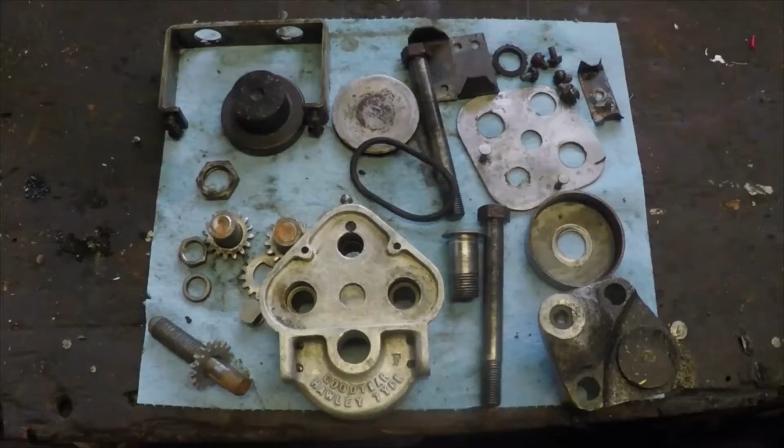Here's a Crosley disc brake caliper torn down to just about every piece. I'll show you a little overview of the parts. I've never seen one of these, at least in the last 40 years, really taken apart in pictures.

My goal here is not to make an exact assembly video, but just to show you how to put it together.

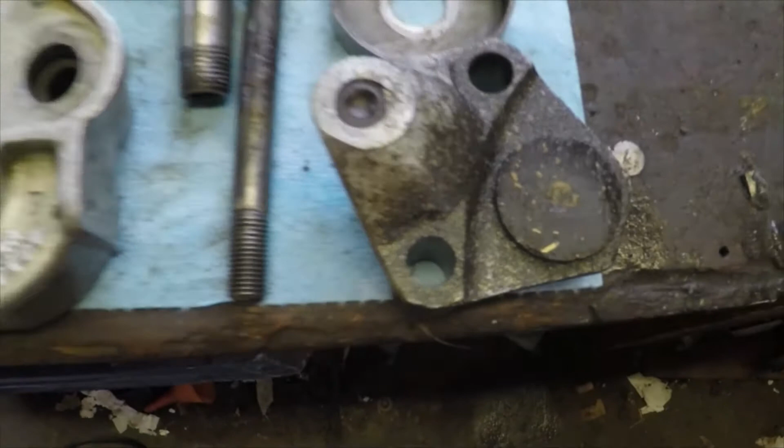This still needs a better cleaning and maybe to paint it to keep it from corroding.

So this is the famous, or kind of infamous, aluminum caliper that was known to dissolve and corrode from road salt and everything, and crack. And here's the front of said caliper.

So here, I'll set you up and I'll attempt to put it together the best I can, show you how it all goes back. So, where to start? Here's that caliper.

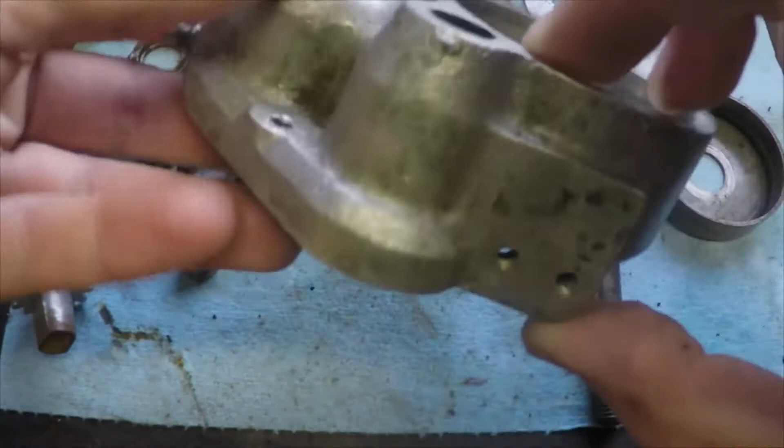I'll start on the outside, the hardware part. Notice it's very strange - this is not a self-adjusting caliper. Imagine the rotors right here. This is the back, this is the front, and it goes like this.

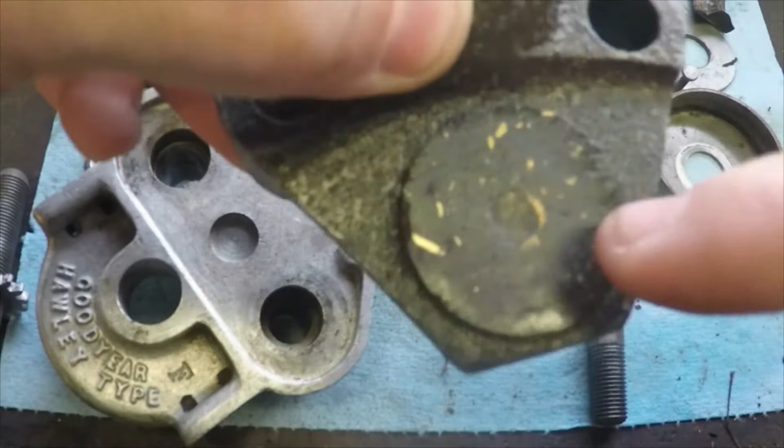Notice you have to rivet and unrivet these little brass rivets, and see right there, mine is down to it, so I have new parts. That won't be in this video - this is just an overview of it.

Shiny piece there. Somebody painted it one time. Anyway, alright, here we go.

So let's do the back part, the gears. Really weird as calipers go. Little rings go in these holes. They're just steel or cast iron, it's irrelevant. Okay, and we're going to make a whole bunch of gears now together.

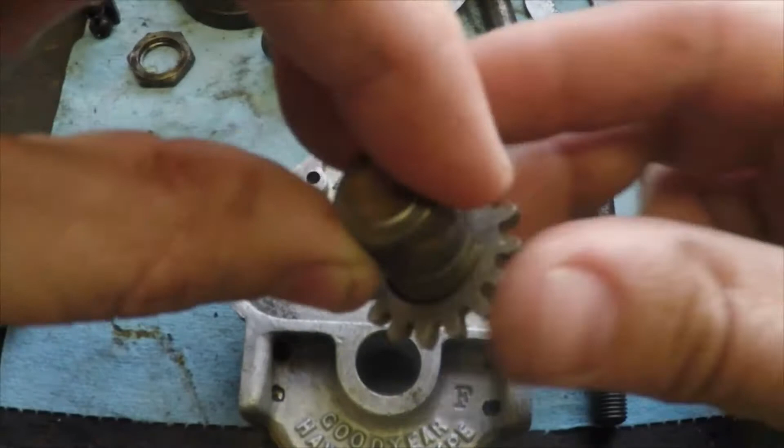See, they're not the highest of quality. So this caliper came out, I believe, in late '49 or mid '49, and they only did it to about mid '50 - it wasn't even a year. They had horrible problems with them.

See how that barely even... that's not even worn out, that's just how that's made. Anyway, put that there, see? Okay, same thing here. It's just atrocious quality, isn't it?

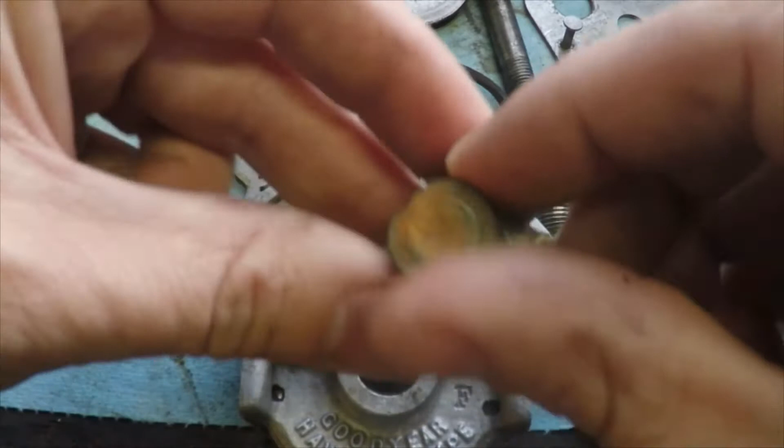Okay, put that in. Then this doodad - they're not directional, it doesn't really matter. Get it in there, you can see where we're going with this. Now there it is, here is this.

This is actually the adjuster bolt itself, and it's left-hand thread. There's no other way to do it, unfortunately. See what I'm doing here.

Notice up here there's a little hole, a grease fitting. So when I got this caliper off, I got it off really easily actually - nothing broke or was rusted solid, but these gears were just stuck beyond belief, like the adjustment. And that's because the grease inside turned to stone.

There you go, there you go. You get the idea, like that. Okay, and then this plate, just a steel plate, not even galvanized, goes all over top. So imagine there's a bunch of grease in here - squirt, squirt, squirt, squirt.

Like this. That's basically it on the back. So when you turn this, see how they turn? So this caliper does not self-adjust - you have to constantly adjust it, which is another problem.

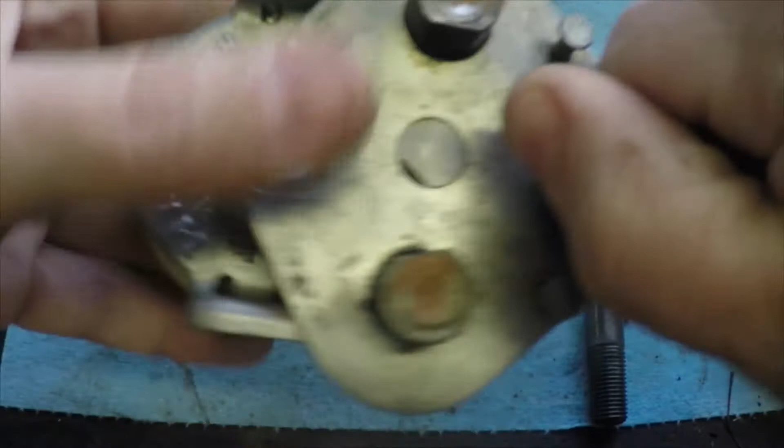It was fine on aircraft, what it was designed for. Here, here we go. Got stuck there. Oh, gear fell off - that doesn't happen when the cover's on.

There you go. You normally wouldn't take that cover off - I'm just inspecting it because, you know, it was built in about '49. I'm just inspecting. But anyway, you see how that turns.

Left-hand thread, and it pushes on this. So this is what you see when you take your wheel off, like this - the rotor right here. I'll show you a picture in just a moment to make it all simple. Anyway, so there's that, okay?

Now, while holding that together, they originally had something called a pulsator - it was basically just a flat rubber disc in between two pieces of metal. This is one of the first disc brake systems to come out in mass market. There were a couple others, but this is, for all intents and purposes, what we consider the first, at least stateside.

And so you got to think, well, how did they come up with this? They're used to drums, and actually my car, '48 and back, had mechanical brakes - mechanical drum brakes with cables. It was known, it was cheap, and there you go. This is an economy car, remember?

Anyway, so here's this little plate, which I thought - oh, got that out. It's just a cup. You notice inside this is rotten, but it gives you the idea. So this goes here, it's got a little hole through it. Get the hole just right, it's filthy. Anyway, it goes there.

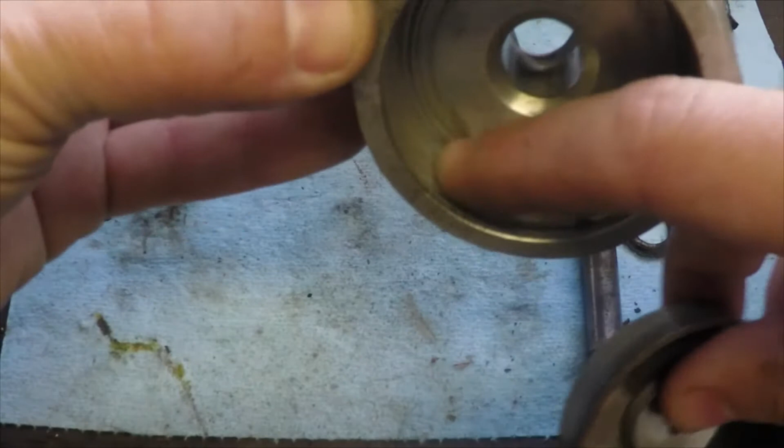And an O-ring goes on the back - just imagine that goes on the back. And then this hole - so this is not the actual surface where the brake fluid and the seal actually touch. This is just a housing, basically, to hold all this. That's it, okay? Like that.

Go over in the back, just forget all those damn gears a second - they all fell off. Hang on a second.

So brake fluid comes through here, and here's the little pipe. You put a nut on that little pipe, like this. There you go, like that. You get the idea.

A brake hose comes into here and screws in. You're probably already yelling at this like 'well, there's something missing here,' but hang on. So now, how do we get the brakes to move out?

Here's this, this is the upgrade. When these brakes came out, they had a pulsator. It was a little more than two flat discs with a rubber bit in the middle. It looked like a solid rubber bit, I don't know, I've never seen one. But then they quickly learned it was a horrible idea, and so they changed it to this disc.

So every Crosley with disc brakes, before they were discontinued, was sent back for a recall, or a service bulletin, I don't know if you paid. And we're given this instead.

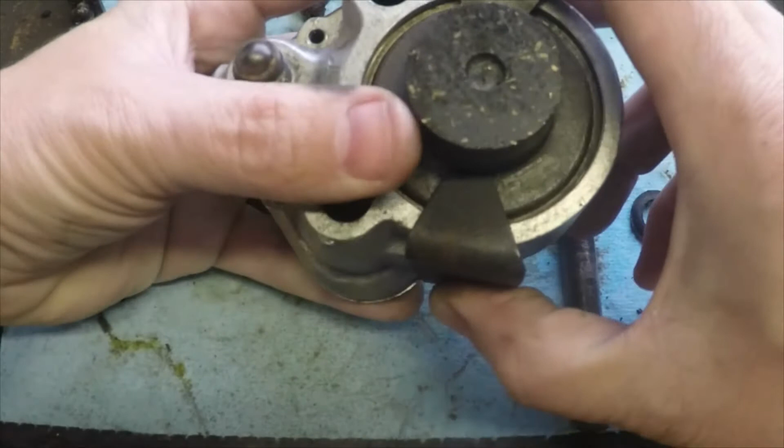And there you go. So maybe it'll push against that a little bit, and you'll feel it on the pedal. Don't know, it is kind of a spring steel, not just a regular - I don't think it's just a regular bracket. Maybe it is. Okay, so you got that.

So you got this all assembled, you're thinking, hey, I got this figured out. All right, what do you do now? So here's a bracket.

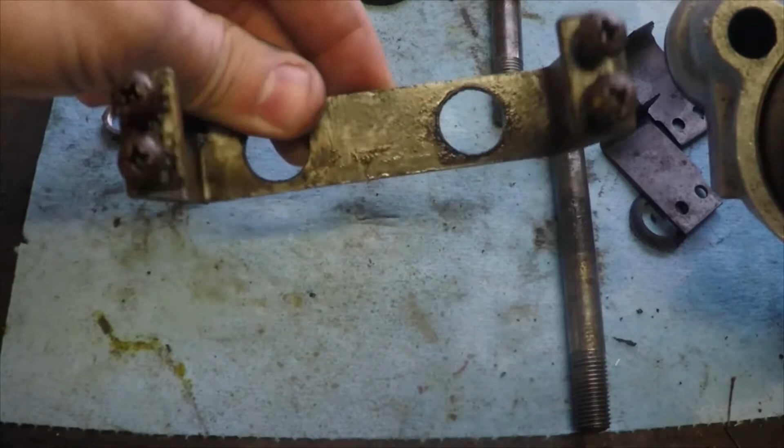This is quite a contraption, isn't it? It looks just like a bent piece of steel with four little Phillips head machine screws. Here's this, okay, over the back. Remember, this is all together already.

If you were just changing the brake shoes, you would just pop out that little hockey puck, take it all out with you to your press or whatever you're working on. This would all stay. Here's this.

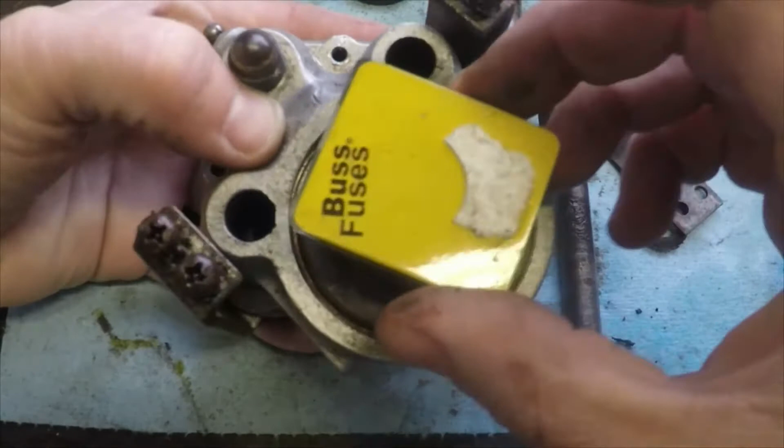Okay, there you go. Now, let's imagine here's our rotor - please, we'll get crap about that. Okay, so this goes over like that, all right? Something like that. Okay, so get that out of the way. Too thick, see, something like that.

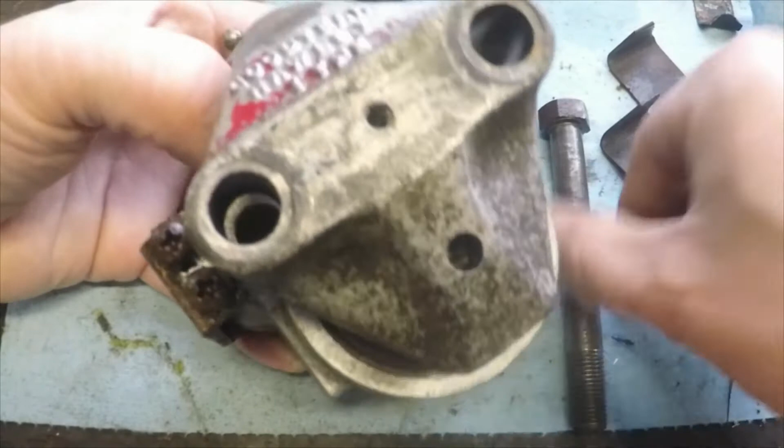And then where's your bolts? Right here, your bolts go in to those little things on the back, those hollow plugs that you saw had gears in them.

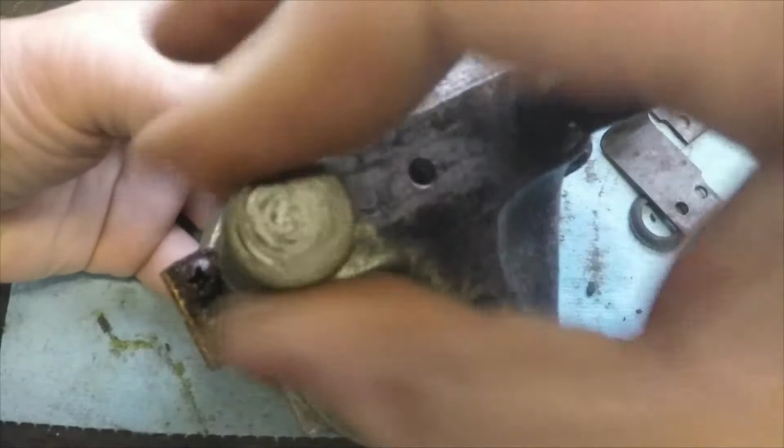Okay, so let me see what's going on here. So these, one, two, where my finger is here, these little brackets slide over a clamp. It's kind of a caliper bracket. I can't show you, it's too dark out there.

On the car itself, so that stays on. So the only thing this is attached to through the car, basically, is a wee little sheet metal bracket that sits on the car that this attaches to. These just kind of go through it. Anyway, so you screw these on.

We'll come to the adjustment here. Kind of a neat thing, isn't it? Don't mind this, those were those little springs I showed you. Use your imagination, they just sit right here. Okay, there you go, so it's on.

Well, how do you go about adjusting this thing? Okay, so according to the book, there's... where did that washer go? I didn't put it back on apparently. There is a washer that goes right here, okay? The lock washer, this is left-hand thread. I hope I didn't lose it. I'm sure it's replaceable. No, never mind.

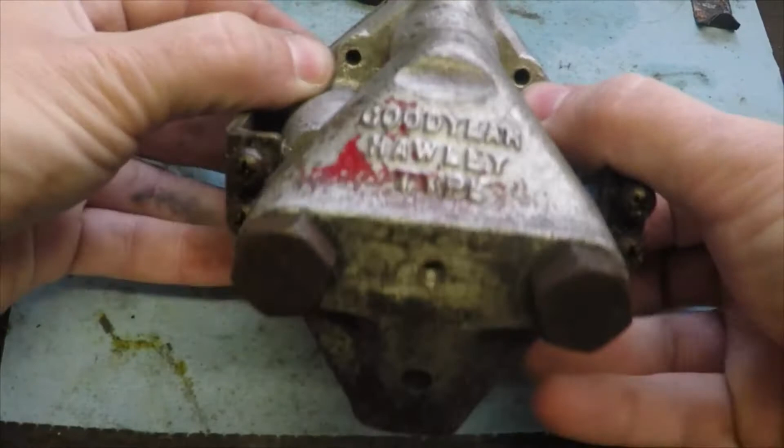There's one, I have a new kit. Okay, so there's a lock washer right here. You unloosen the lock washer, remember: righty loosey, lefty tighty. As you're facing the caliper, turn it this way. And once it gets snug, back it off, I believe, a quarter of a turn. Okay, then you lock this back. Fine.

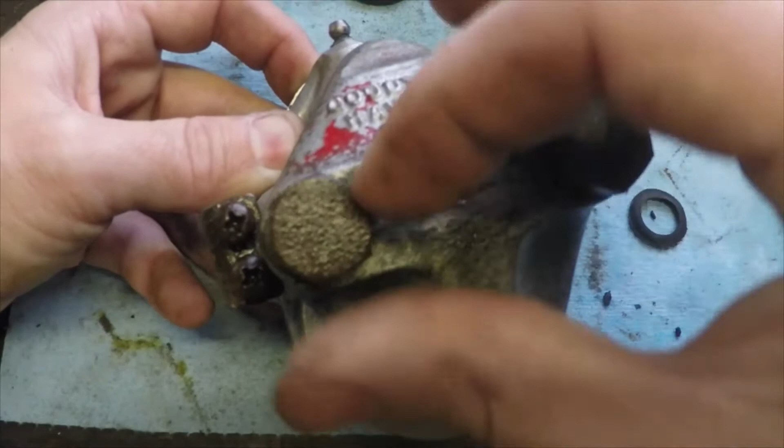Okay, so how do you tighten the front though? That looks really weird, I mean it couldn't be solid. So the book recommends, if you want to take this off or change your pads or whatever, once you take it off and do all your brake work, put this back on hand tight. It's a little more than that, that's probably even too much there. Hand tight.

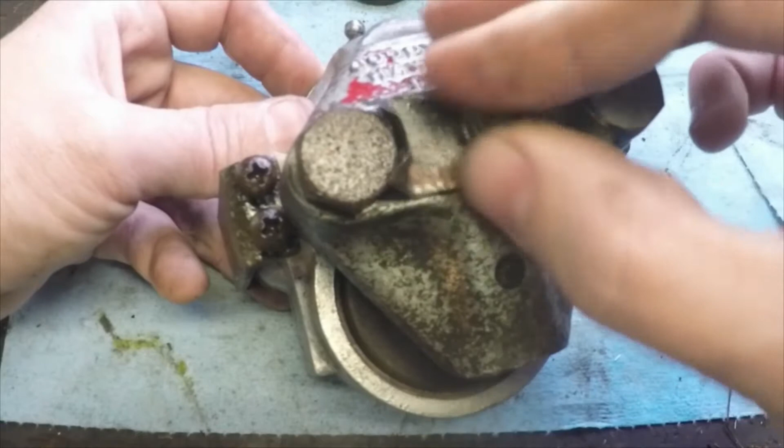So these are just loose, essentially, just snugged up by hand, that's it. And then this goes on. And you have a Crosley brake caliper, you see there's not much there.

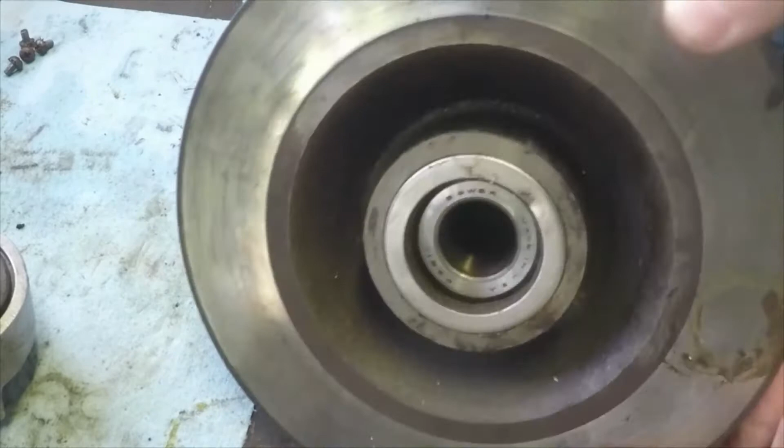Here is that Crosley rotor. See, it's all one piece. Still has the Bower branded bearings in there, those bearings are perfect. Has a felt wheel seal on the back. I have a more modern one coming, it attracts dirt so bad. Anyway, that's it, I mean it's just a rotor, but it's all cast in one piece.

I can only imagine how hard this is to get. This is in really good shape. This car had sat under a barn since the late 70s, put up in storage, and everything was coated in grease. I've cleaned it off, but that doesn't look bad at all. Then you look over the back, this car hasn't been on the road since at least the late 70s, I'd say definitely. Anyway, look at that, it's like it just came off being used a couple hours ago, doesn't it? It's amazing.

Anyway, that slips up into here. This slips up into here. If I can do it up, it's too adjusted, can't even get it in there. But like that. So, what's something I missed, or something you could say they missed or didn't know about or think about?

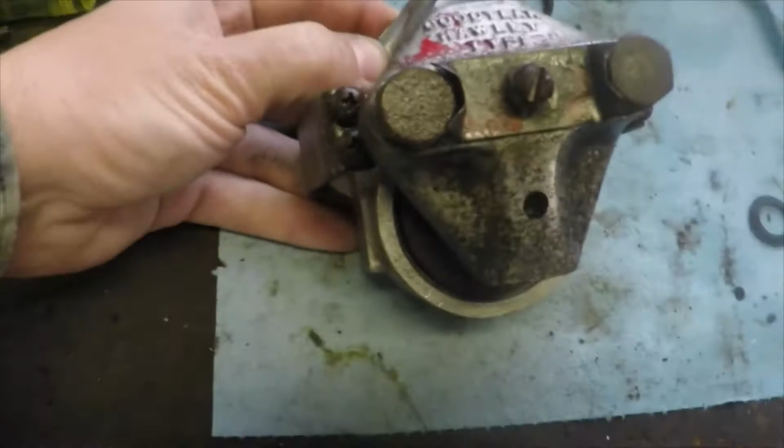How do you bleed the brakes on this? It's not this, that's just a grease fitting. And let's go all around it, get that out of the way. You get the idea what that does.

And remember, these little things go right here, they stay on there unless you're doing brake work. Those are like tiny little keepers, keep it in so you don't explode your brakes and die. As this goes around, okay, there's a drain hole, maybe moisture gets in. Okay, I don't see any bleeder, do you?

Let's go around the back. There's this, that's that pipe, remember, brake hose screws on there. Anybody know how you bleed it? Oh wait, all right, long enough. Brake hose is in here, and the brake hose is how you bleed it.

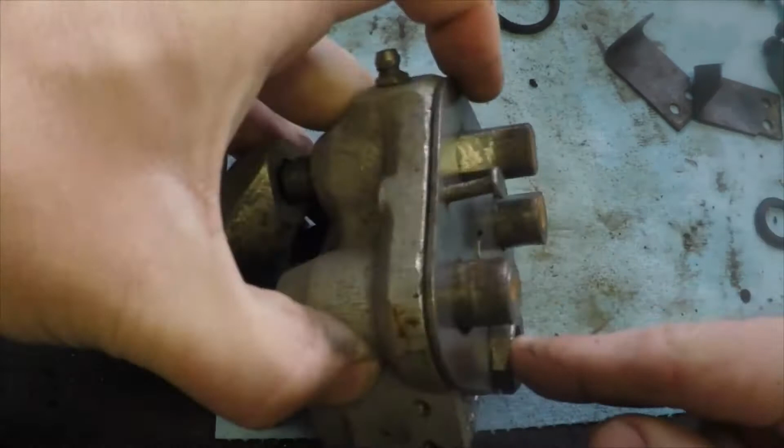The brake hose actually seats against this with a washer, and just right up before the flat part of the hose, where it actually turns against it and seals, there's a little hole drilled, like a little, I don't know, 16th, 8th inch hole. I guess 8th inch hole, I don't know exactly. It's not big at all. And just a couple threads before the nut of the brake hose, you back it out like a half a turn, and brake fluid squirts everywhere, and you tighten it up. That's it. Kind of archaic, isn't it? But it worked, in design it's a good idea.

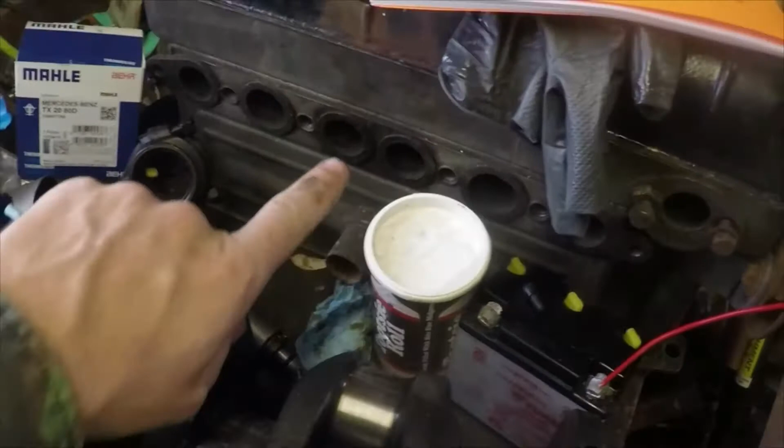I mean, four-wheel disc brakes in '49-'50, that's crazy. He was really ahead of his time, just like with the, here, get me over here, just like with the Cobra engine here. Here's one. Crosley.

And here, somewhere... is it? Here. Going down the rabbit hole here. Oh! There you go, going down the rabbit hole.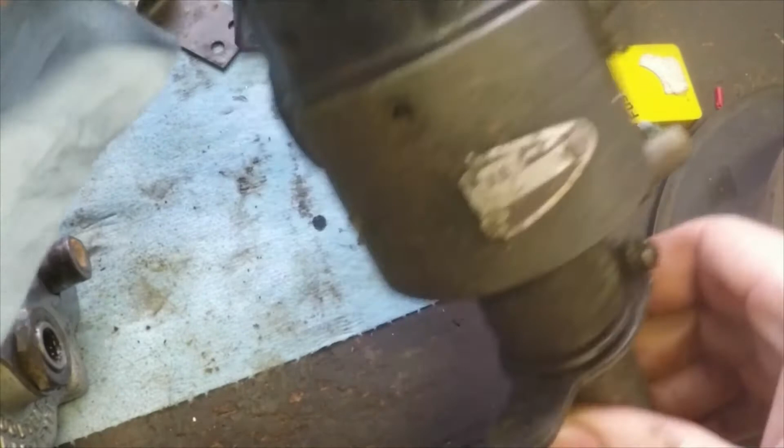Good old Autolite, when they were good. Notice the oil hole? You'd also have a piece of felt up in here, because I definitely would, and put a little bit of drop or two there if you're choosing.

That's how you get the distributor out. You have to take off the oil pan, get the distributor out. The distributor has to come out before the crank.

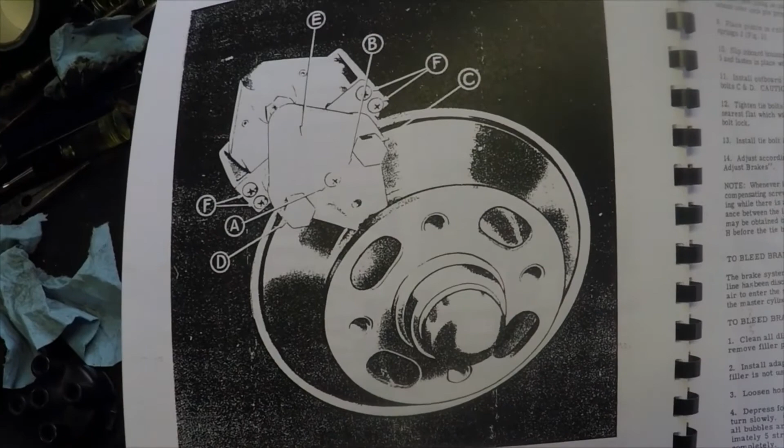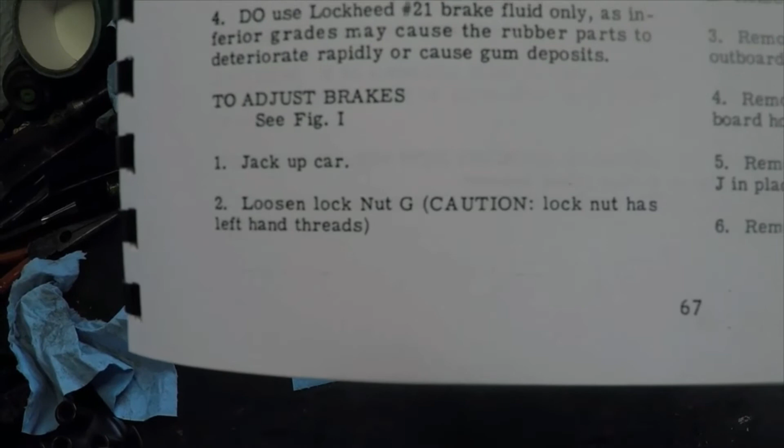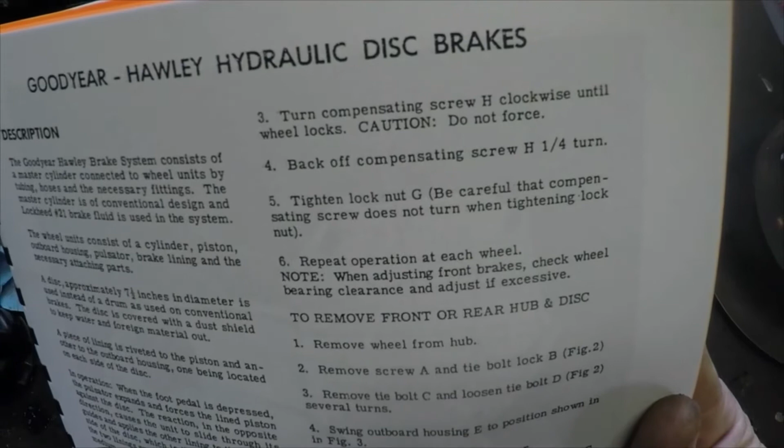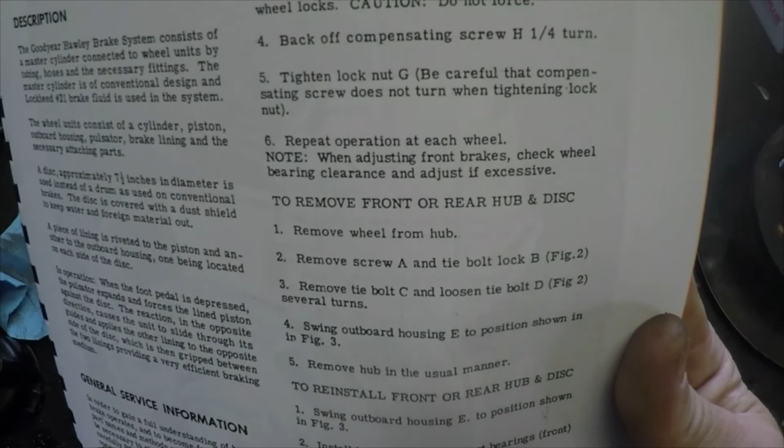Here, I'll put it back to how to adjust it. Adjust the brakes: jack up the car. Loosen lock nut G - caution, lock nut has left-hand threads. Turn compensating screw H clockwise until wheel locks. Caution, do not force. Back off compensating screw H a quarter turn - excuse me, you back it off. Tighten lock nut G, being careful that the compensating screw does not turn. Repeat operation on each wheel, blah blah blah.

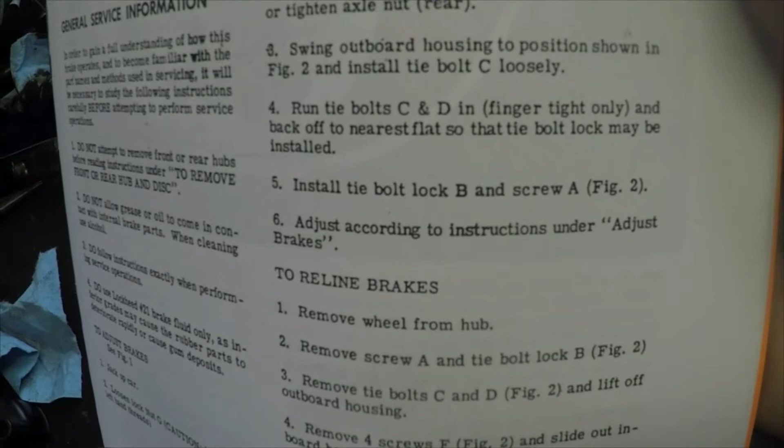And what it does not show you about... oh, there it is, number 4 there. Run the tie bolts, those big bolts C and D, finger tight only, and back off to the nearest flat so the tie bolt lock may be installed. There you go, that's it. Pretty simple.

Here, I'll go ahead and take this all apart. Again, I'll show you what I did. I think this one's somebody's rigging - that don't look right to me. But nonetheless.

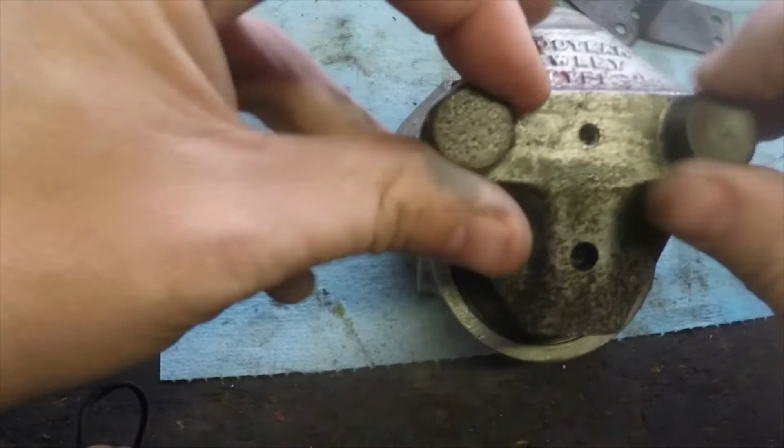So there's where the rivet is - got to drill that out. I guess I'll use brass rivets. They only stop at about 1,300 pounds. There's not much to it.

It's an interesting design, which by today's brake caliper standards is just so archaic, but simple. Almost reminds me of something on like a go-kart or a golf cart - just something kind of cheap and dinky. I don't mean that in a bad way. Somebody had to come up with the first one, so I'm not knocking it, just saying. There's that, so.

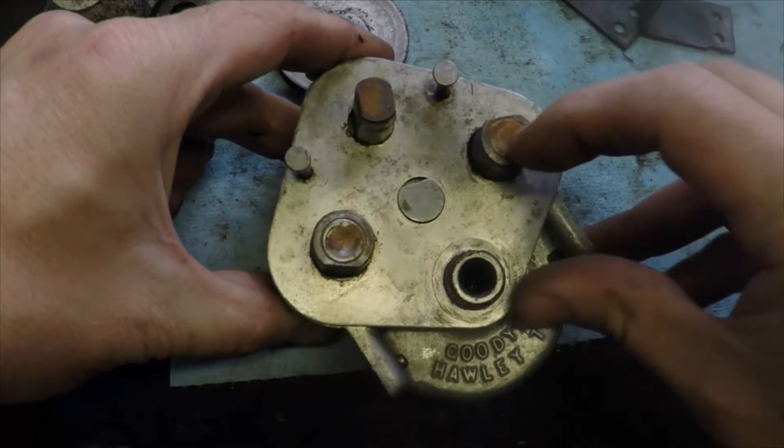Remember, nothing hard on these old calipers. The worst part's undoing the rivets. Here.

Rawhide mallet. There you go.

You can see this little pipe might be screwed up - that's how it was when I got it. See, it's kind of stripped. Could be an issue, I don't know, as long as it gets tight and seals. But your braking surface is only in that thing. Imagine this is squeaky clean. Anyway, there you go.

Got mostly all new nuts and washers.

Should I paint that? No, just coat it in grease.

And then that. Oh, that's right, there you go.

I did check this grease fitting - grease does come out. So next maybe I'll paint it. I'm not going to use a caliper paint. I don't think these are going to ever get that hot - you can't tell me this is going to get incredibly hot, no way. Maybe, I mean, I'm going to go with an epoxy paint, like I'm going to use called Rust Bullet. It can be used on aluminum too if it's properly cleaned and etched gently. I thought that would be nice. I could be wrong in that, but I just don't see this thing getting burning hot.

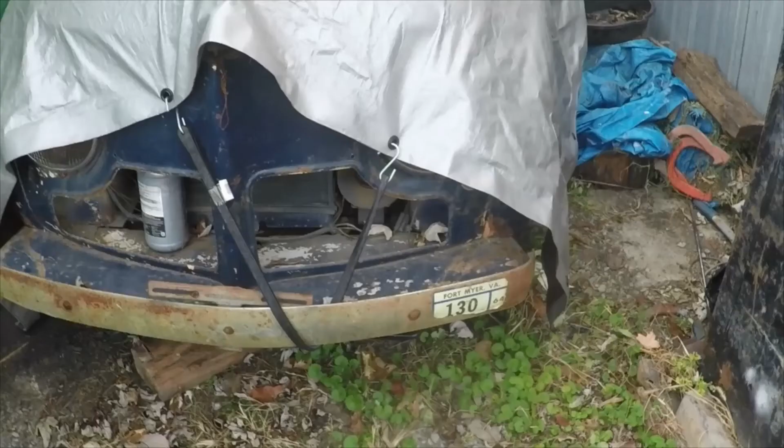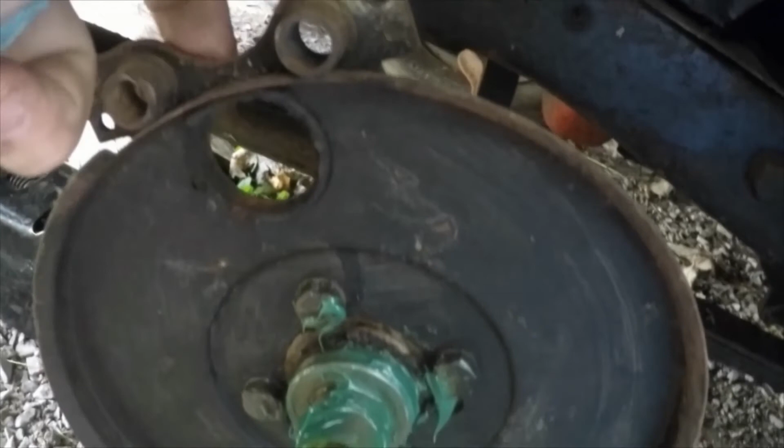There's that bracket I was talking about, so those 4 screws just grip into that, then the bolts go through those holes. That's it. Now that caliper does sit in here - that little brake pad goes in here and just kind of holds in there, so that way you don't snap that rivet off. Look at the tiny little springs.

Oh, I love this little car. I greased it up real good there. There you go. Look at the dinky little tie rod - dinky. Steering arm.